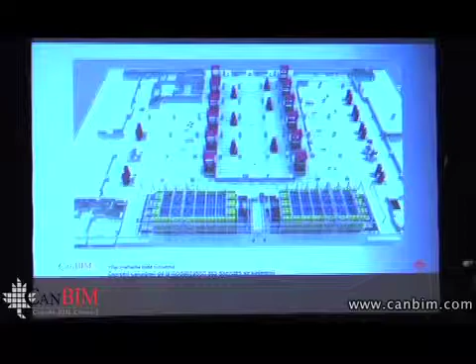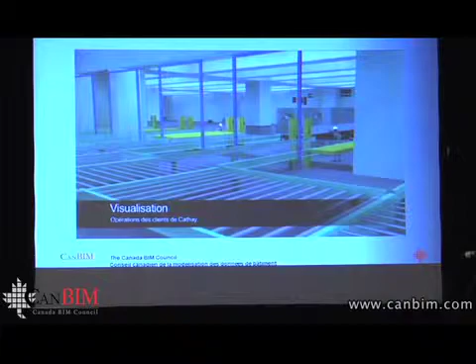Intelibuild, conception services and virtual construction. The Cathay Pacific Cargo Terminal project in Hong Kong used the BIM process to save time and money during the construction phase. The handling system was modelized by Siemens and coordinated with the concrete structure with Intelibuild. All of it was connected to the cargo delivery system. So the model enabled Softimage simulation showing the customer the functioning.

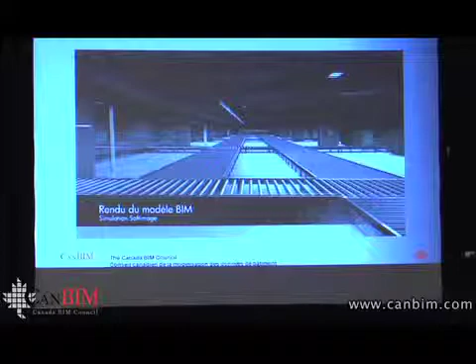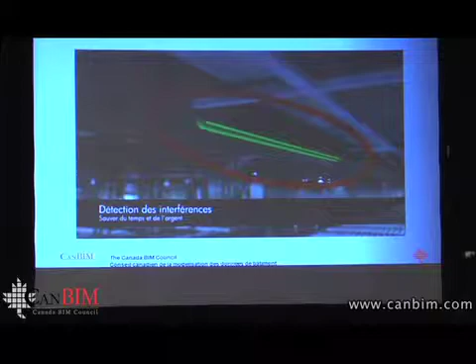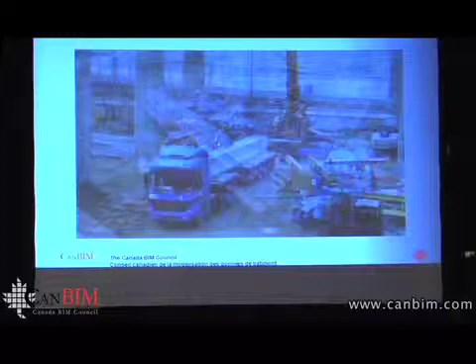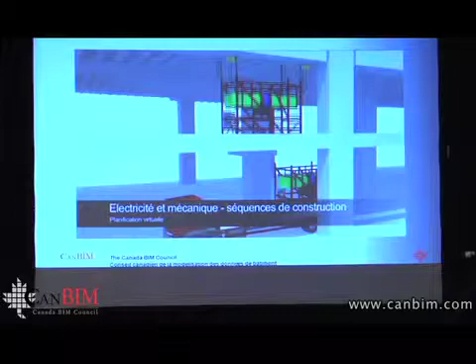The BIM model was used to coordinate the different systems in the building, the air vents, electrical cable support, and cargo systems. Intelibuild developed an identification system for interferences among different architectural, structural, plumbing, and air vent models in order to resolve conflicts. The Intelibuild team was set up on the construction team itself and worked closely with the general contractor. A virtual simulation of construction enabled the planning of the concrete joists and the MEP components using prefab modules, which was also planned in the virtual construction phase of Intelibuild.

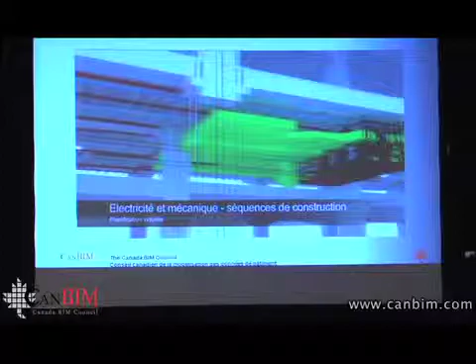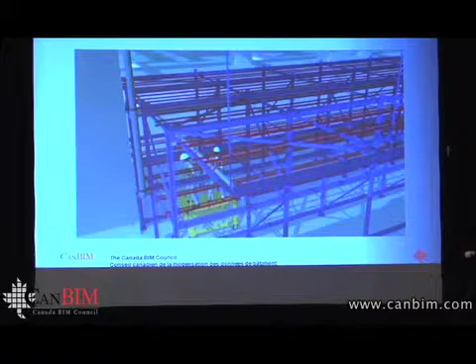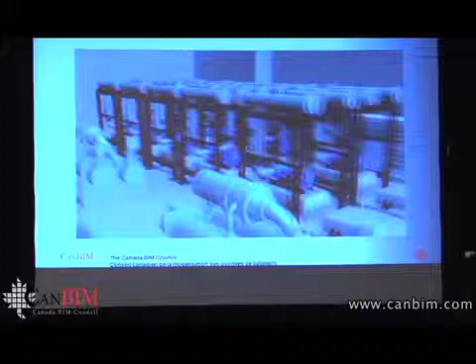It is an efficient method and a lower cost for the contractor. Detailed reports were produced to examine the safety systems required to install the different piping systems on the different floors. They were able, with the system, to modelize large areas, large rooms, setting up of pumps. The great cooling system on the roof was also checked and evaluated.

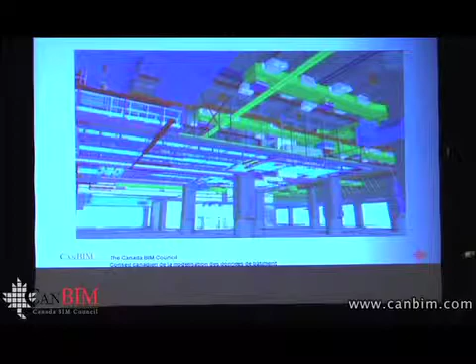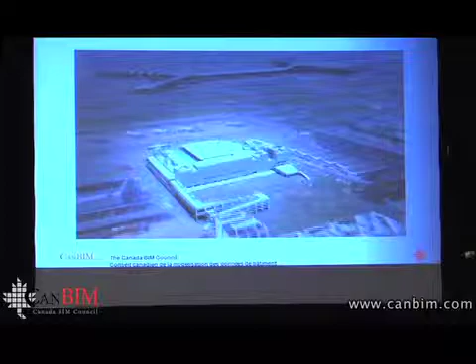A comparison with the BIM models and the on-site conditions showed the precision and the high level of detail of the BIM system from Intelibuild. Everything that was set up within the building had first been modelized in 3D. Cable support, ducts, pipes were installed exactly where they had been planned in the virtual construction model. The design and virtual construction models enabled Cathay Pacific Airways, the owner, and the general contractor to save time and money in order to build their project.